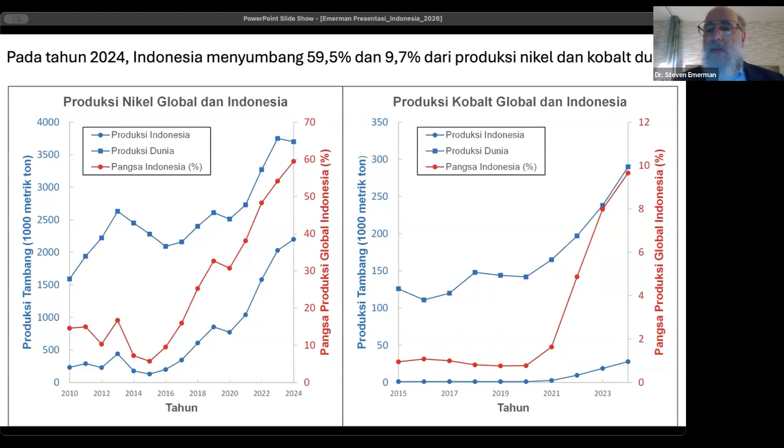Okay, so by 2024, Indonesia accounted for 59.5% and 9.7% of world nickel and cobalt production, respectively. And look especially at nickel over the last 10 years. From 2015, Indonesia has exploded from 5% of world nickel production up to almost 60%. If we look on the right-hand side for cobalt, Indonesia's share of world cobalt production has exploded from 1% to almost 10%. Slide 5.

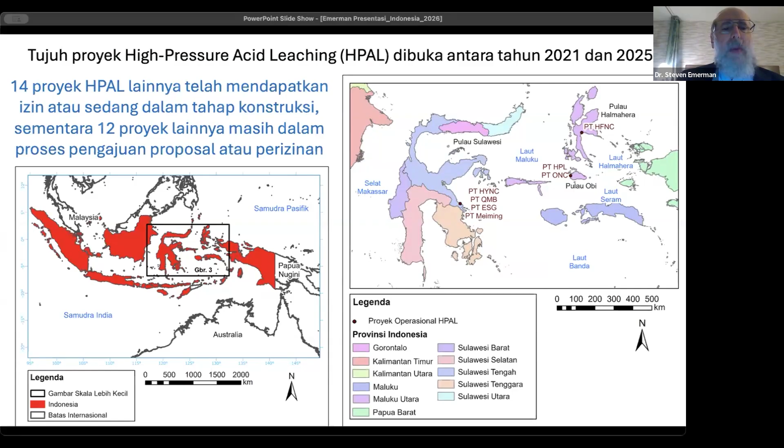Now, most of this has been made possible by the very rapid introduction of high-pressure acid leaching in Indonesia. So 7 HPAL projects opened between 2021 and 2025. This is just the beginning. 14 more HPAL projects are permitted or under construction, and 12 more are in the proposal or the permitting phase. Slide 6.

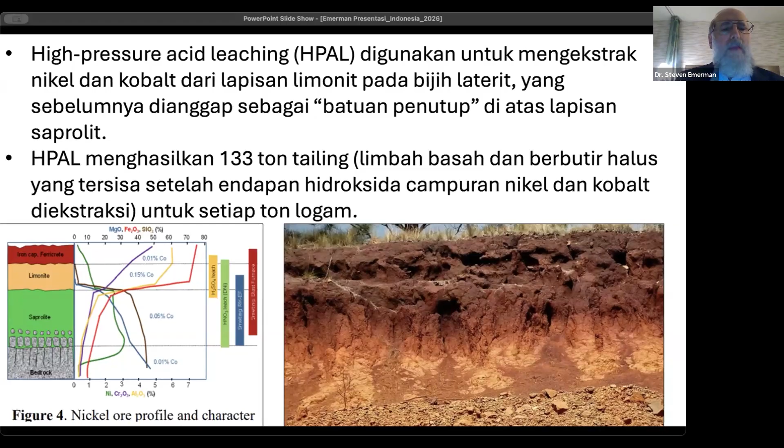So HPAL produces 133 tons of tailings for every ton of metal. Tailings are the wet and the fine-grained waste that remain after mixed hydroxide precipitates of nickel and cobalt have been extracted. Slide 7. Okay, this is the problem that filter tailings are trying to address, which is failure by liquefaction, a common problem in conventional or wet tailings facilities.

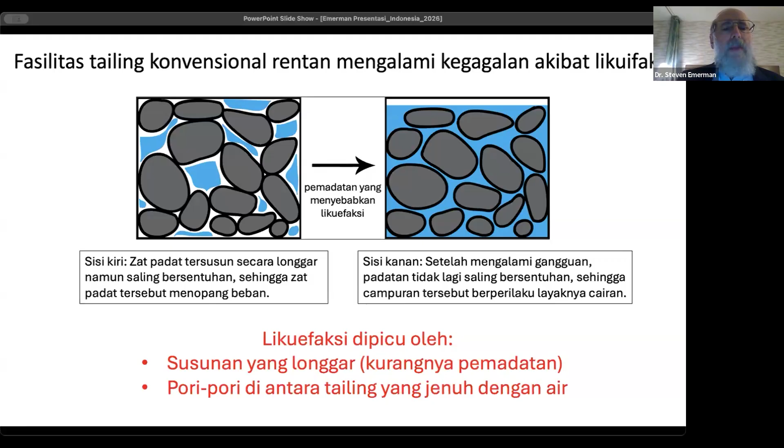So this liquefaction is promoted by loose packing, that is a lack of compaction, and the pores between the tailings saturated with water. Okay, slide 8. Now, filter tailings technology tries to address this problem. It reduces the likelihood of failure.

The filter tailings are partially dewatered to achieve an optimum water content for maximum compaction. This happens to be just a few percentage points below saturation. Now, because these tailings have been partially dewatered, they can be compacted into the tailings storage facility. That reduces the likelihood of liquefaction. Typical hard rock filter tailings have a water content of about 15%. They don't behave like a slurry, they behave like a moist soil. Okay, so far so good with filter tailings.

Now there's another expression that's used almost exclusively in Indonesia, that is dry stacking. Dry stacking is not really a technical term. That's a marketing or a public relations expression. If the tailings were literally dry, which they're not, the tailings could not be compacted, the tailings piles would not be trafficable, and the dust would be unmanageable.

Now in Indonesia, all HPAL projects use filter tailings technology. Because these tailings are so fine-grained, typical water contents are in the range 30 to 35%, so much higher than for filter tailings that come from hard rock mining. Indonesia is a very challenging environment for filter tailings technology.

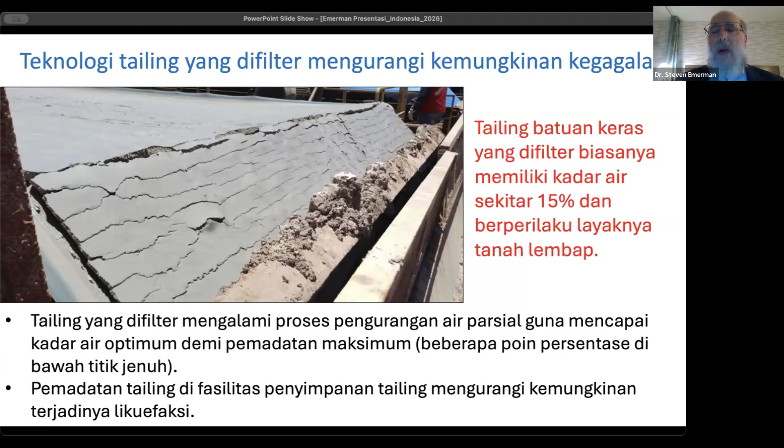Now, if we look at Google Earth imagery from January 3rd, 2025, on the left-hand side, that clearly shows a landslide from the filtered tailings storage facility operated by PT HYNC with clearly defined channels for tailings to travel to the Bahodopi River. Thus, it appears that at least one collapse of this tailings facility occurred even before that collapse on March 16th, 2025.

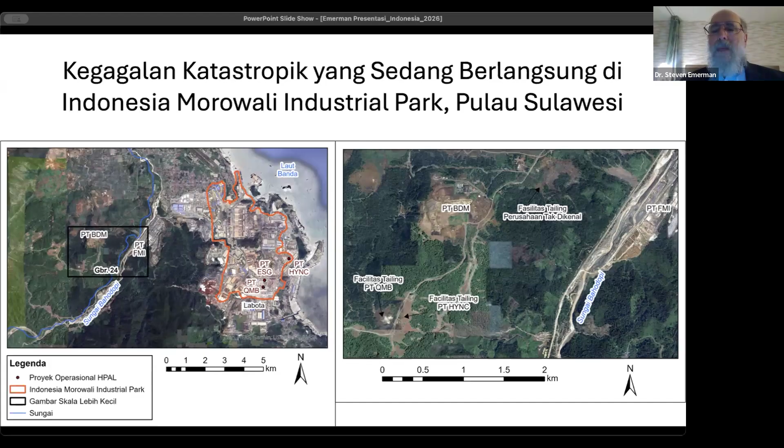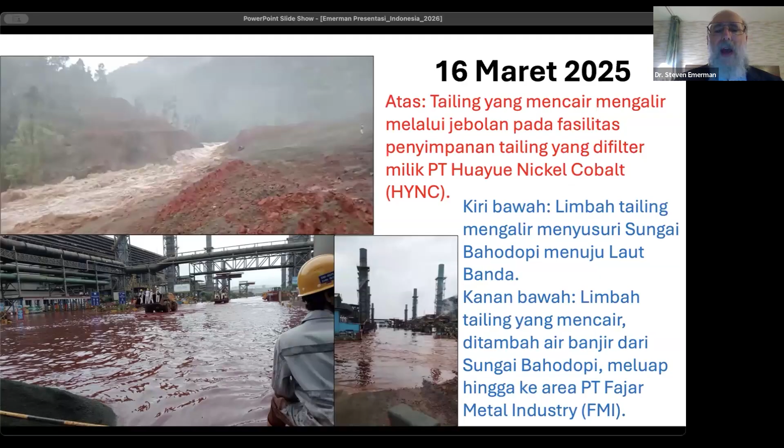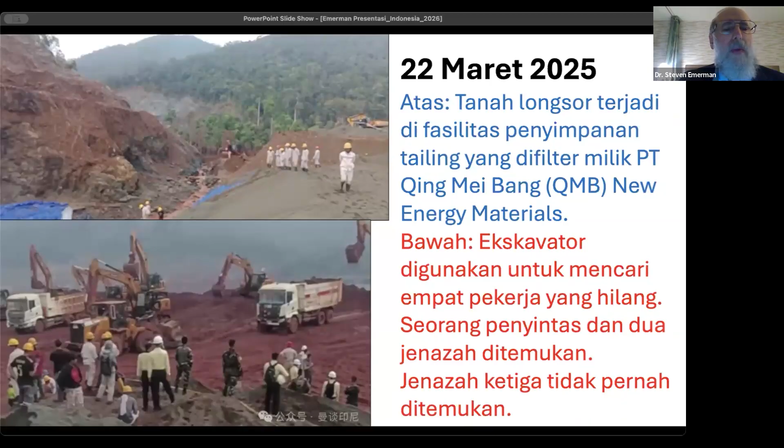Most recently, February 18th of this year, another landslide at the same filtered tailings storage facility with the death of 1 worker. Okay, the response by the mining company, PT QMB, to the fatalities of last year, this is what they said in English: This was an extraordinary natural disaster classified as a once in 50 years rainfall event where the resulting floods and landslides were beyond human control.

Okay, now that actually doesn't make any sense. Heavy rainfall can never be the cause of failure of an engineering facility that's supposed to be designed to withstand the expected rainfall. The failure is a failure of design. And in any event, designed for a 50-year event, that's an event that has a probability of exceedance of 2% in any given year. That's literally appropriate for the storm drains at a shopping mall.

An engineered facility for which failure would result in the loss of life should be designed to withstand a 10,000-year event. That is an annual exceedance probability of 0.01%. Okay, so what was the response of the Indonesian government? They gave an award for environmental protection to the Indonesia Morowali Industrial Park.

Okay, now I'm going to go to Obi Island and especially look at the PTHPL dry stack facility. And I'm going to talk about its imminent catastrophic failure. Now, insight into design and construction was obtained through 4 key documents and their sequence of revisions. And I'll mostly be discussing this document on the right, which is called Independent Technical Assessment Report of the PTHPL facility. Sorry, that was a little hard for me to read. Okay, so let's look at what this report says.

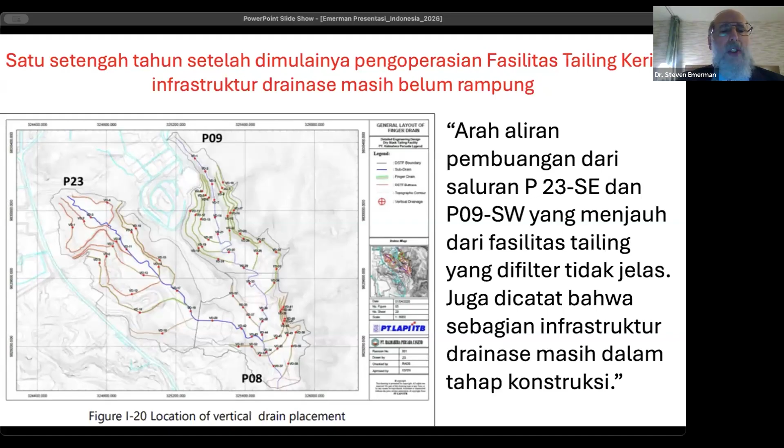Okay, this report tells us that the dry stack tailings facility was constructed virtually without any quality control. Although the target water content was 35%, the actual water contents range from 8 to 36%. That is, they very rarely got the water content they needed to compact the tailings. Although the target compacted density was 2.20 metric tons per cubic meter, the actual compacted densities range from 0.93 to 2.20 metric tons per cubic meter.

Now, what the consulting report did not say is this is a problem that cannot be fixed. This problem cannot be repaired even by carrying out perfect quality control from now on. At any moment, the tailing stack could suddenly attempt to compact, leading to liquefaction. The dry stack tailings facility was constructed without virtually any monitoring. Okay, this is a quote from the report.

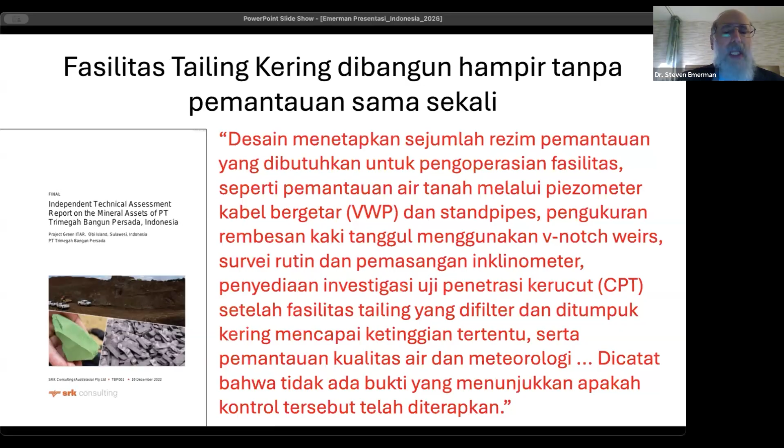The design specifies a number of monitoring regimes required for operation of the facility, such as groundwater monitoring via vibrating wire piezometers and standpipes, toe seepage measurements with V-notch weirs, regular surveys and installation of inclinometers, provision for cone penetration test investigations once the dry stack tailings facility reaches certain heights, water quality, and meteorological monitoring. It is noted that no evidence has been provided as to whether any of the controls have been implemented. So essentially, the facility has no monitoring.

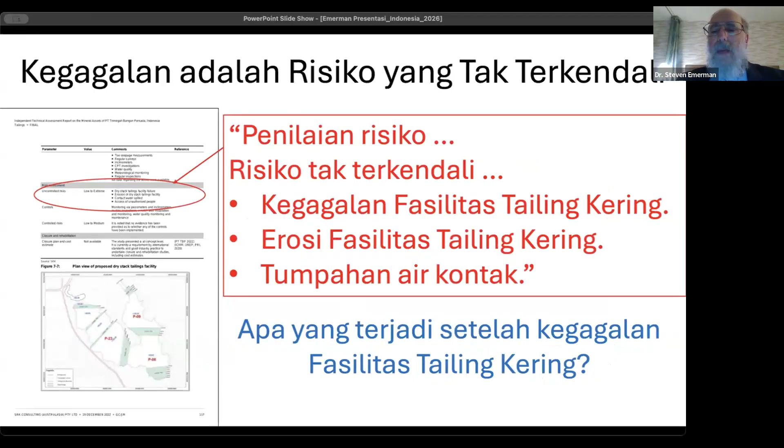Okay. The report also said that the dry stack tailings facility was constructed without virtually any adherence to design. It was also noted that part of the drainage infrastructure was still under construction. I'm sorry, I've been forgetting to tell you the slide numbers. We're on slide 25. Perimeter toe drain issues identified, and some areas are still under construction. Water treatment ponds in poor condition, and some areas are still under construction. Slide 26.

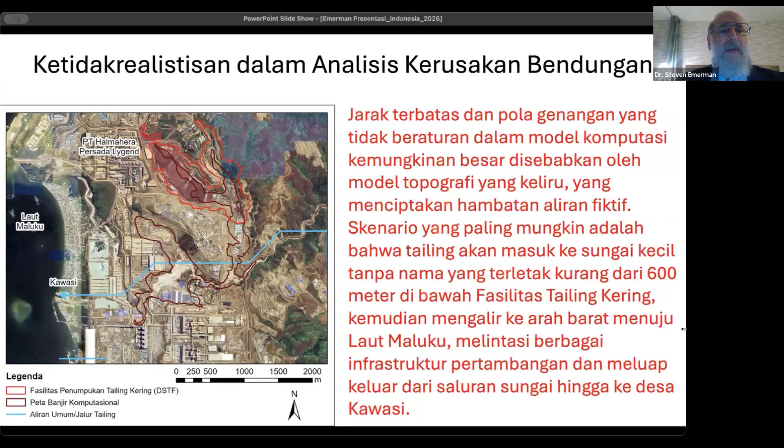The report concluded that failure is an uncontrolled risk. The risk assessment said there are uncontrolled risks, which it listed as the dry stack tailings facility failure, erosion of the dry stack tailings facility, and spillage of contact water. So we asked the question, what happens after failure of the dry stack tailings facility? Slide 27. In this report, there's a dam break analysis, which is completely unrealistic.

We see a very limited distance and this very irregular ponding. This limited distance and irregular ponding that's predicted by their computational flooding map results from an incorrect topographic model that creates fictitious barriers to flow. For example, looking at a bridge and modeling that as if it were a concrete barrier.

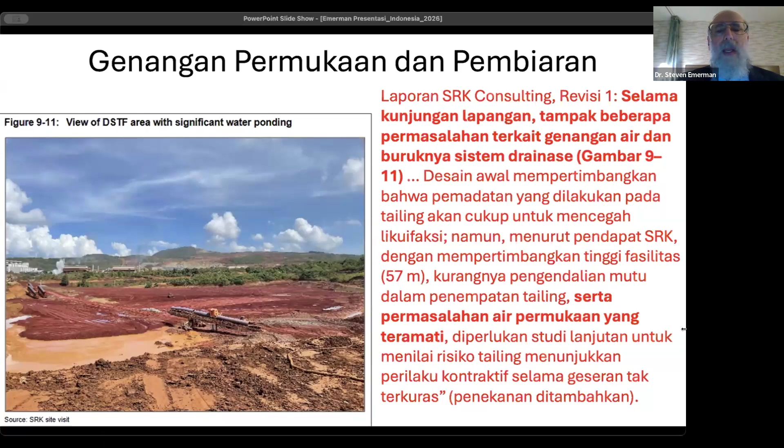The most likely scenario is that the tailings will enter an unnamed stream less than 600 meters downslope from the dry stack tailings facility and then flow westward to the Maluku Sea with crossing of considerable mining infrastructure and overtopping of the stream channel onto the village of Kawasi. Slide 28. Now, I'm going to talk about something very important we need to follow carefully.

And this is the way in which this consulting report by SRK Consulting gradually modified their conclusions so that at the end, they said the opposite of what they started saying. So let's look at the beginning, revision 1. We see a diagram that says view of the dry stack tailings facility with significant water ponding. Okay, this is what they say. And notice the part that's in boldface, I'm emphasizing.

During the site visit, some issues with water ponding and poor drainage appeared to be present, and they refer to this diagram, figure 9.11. The design considered that the compaction imposed on the tailings would be sufficient to prevent liquefaction. However, it is SRK's opinion that given the height of the facility, 57 meters, the lack of quality control in the placement of tailings, and the observed surface water issues, further study is required to assess the risk for the tailings to exhibit contractive behavior during undrained shearing.

Okay, they're very concerned about this surface ponding. And let me explain why. Surface water on top of a filtered tailings storage facility is a very serious issue for at least 5 reasons. Okay, ponded water can lead to erosion and washout of the filtered tailings stack. Areas with ponded water cannot be compacted because those areas are not trafficable.

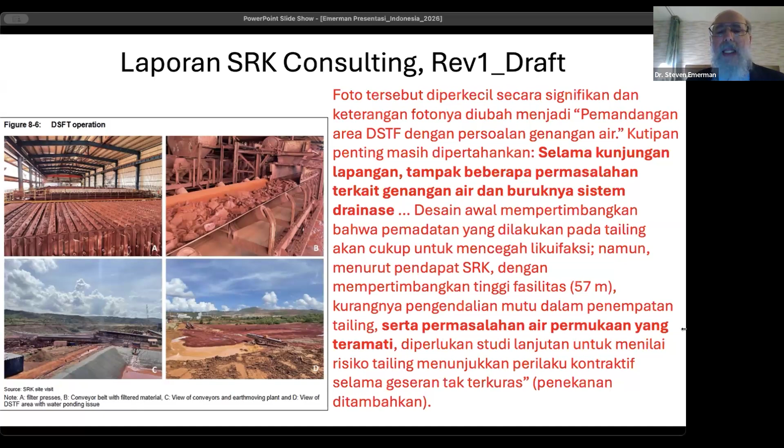Okay, next, saturated tailings can potentially liquefy, especially if they were never properly compacted. And finally, if a collapse of the filtered tailings stack did occur, the presence of free water would promote flow behavior of the released tailings. Okay, so a very serious problem. It's also serious because of what it indicates about the construction of the filtered tailings stack.

Okay, so why would it happen that we could have surface ponding? There could be improper filtering of the tailings so that water contents are too high. There could be stacking of the tailings during high rainfall, and that could result from a lack of space for temporary storage of tailings during periods of high rainfall. Could be insufficient sloping of the surfaces to promote runoff, or could be insufficient drainage infrastructure within the filtered tailings stack. Okay, so very serious in terms of consequences and construction.

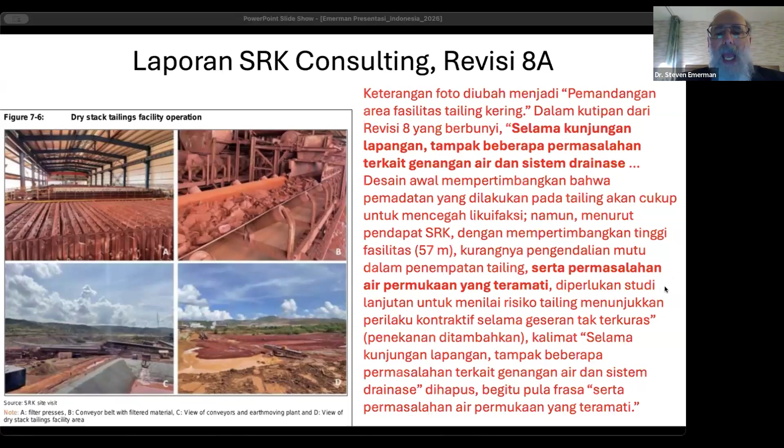During the site visit, some issues with water ponding and poor drainage appeared to be present. The design considered that the compaction imposed on the tailings would be sufficient to prevent liquefaction. However, it is SRK's opinion that given the height of the facility, 57 meters, the lack of quality control in the placement of tailings, and the observed surface water issues, further studies are required to assess the risk for the tailings to have contractive behavior during undrained shearing. Okay, the key passages are in boldface.

Okay, now, the big change occurs in revision 8A. If we look at the lower right, we see that same photo. It's much smaller. Now it's been changed. It just says now, view of dry stack tailings facility area. It doesn't say anything about surface ponding. And whatever is in bold has been removed.

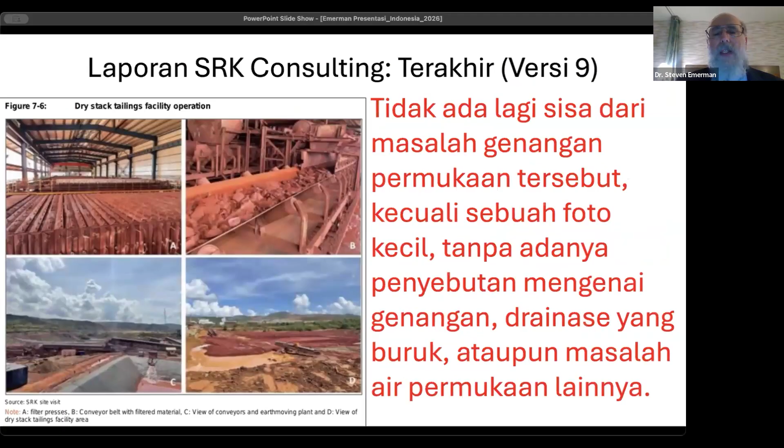Okay, so these are the take-home messages I'm giving you. First, it's tempting to conclude that filter tailings technology simply does not work in Indonesia. I am not coming to that conclusion because, at the same time, it's difficult to escape the other conclusion that no one has really tried very hard to make the technology work. In particular, the practices that have been carried out at the PT HPL project would scarcely be suitable to make the simplest technologies work under the most hospitable circumstances.

And finally, the safest pathway forward is not to give up on filter tailings technology, but to continue with filter tailings technology with the intention of doing it properly. This is the last slide, 36.

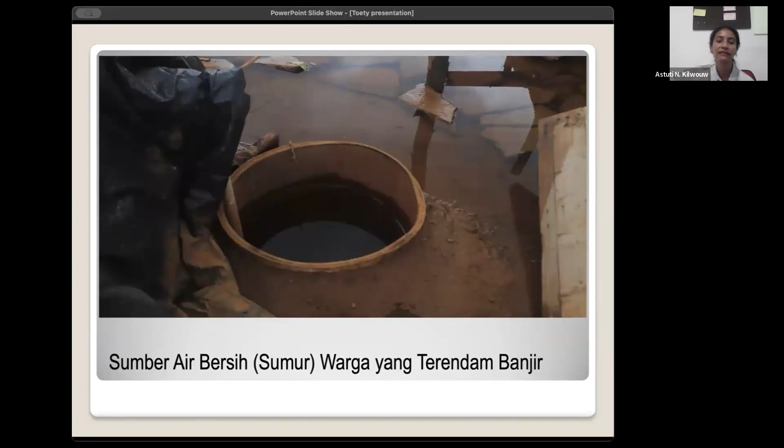This is the water source. This is a kind of well in our place. It's like this, but the well is submerged in water. So this is one of the wells. Now it's flooded.

And now about how we are fighting. They don't want to release their land. They don't want to give their land away. So they blockade the heavy equipment, and they close the road, and then they rally at companies and the local government, the district government, provincial government, and even the House of Parliament. And this campaign, this solidarity, also publication, they are also trying to do all of this.

And this one is the flood in a school. And the company intimidates after that. They also send the police or army, and they also terrorize people who they think are very active.

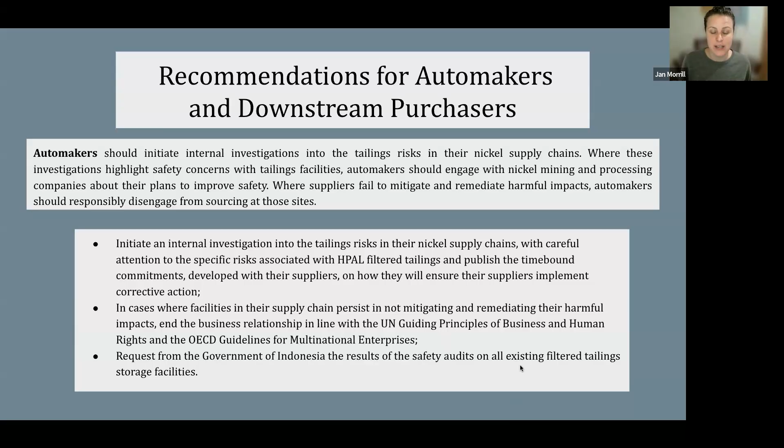So it's incumbent that the companies throughout the supply chain are taking responsibility to hold mining companies accountable for dangerous practices. And this should all be done using international best practice like the UN Guiding Principles on Business and Human Rights and the OECD Guidelines for Multinational Enterprises. And purchasing companies of metals and minerals should also work with and request that the Indonesian government audit mining companies to ensure that their tailings facilities are not posing a risk to communities, workers, and the environment.

And then lastly, again, investors also have a role to play. So investors should also initiate internal investigations into the tailings risks in their portfolios. And they should work with mining companies to improve safety. Again, in the cases where mining companies do not change and do not improve the conditions of their tailings facilities in Indonesia, investors should no longer continue to invest in those projects. And lastly, investors should work with the government and request that the government carry out these safety audits as well to ensure that they are not investing in dangerous facilities.

So there's a lot of changes that need to happen. And we believe that without these significant changes, the risks to Indonesian communities and the environment will continue. And so we look forward to working with our partners in Indonesia to push for these changes across the spectrum.

Thank you, Amien. The first one is about government. Our recommendation is that the government should stop operations if we have a grievance or any issues found. So we need to stop that. And the government should strictly focus on these issues. If not, the government should stop their license. So I think the research that we have done today has reflected the failure of the Indonesian government, especially on the tailing issues in Indonesia. And then the government should improve their policies, especially on accountability and transparency, so that the community and all parties can monitor all the activities on tailing management in Indonesia.